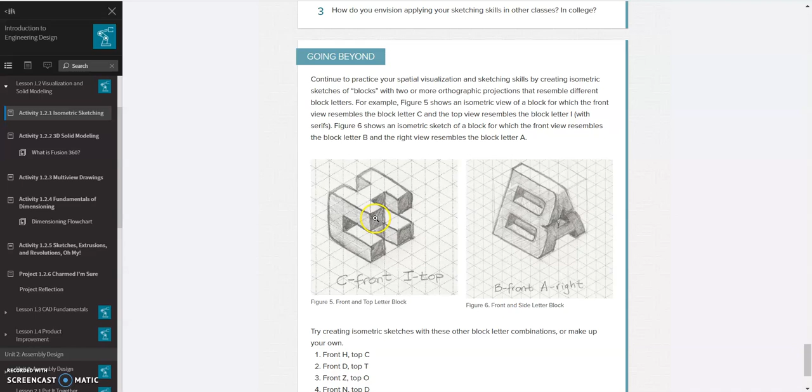In this video we're going to be using Onshape to create these initial cubes like we see here. In this case, we're going to be making a WC initial cube, so you can kind of see what it should look like. In Onshape, I already have a part started. We'll start by just making a cube, and then we'll do some subtractive methods to create our initial cube.

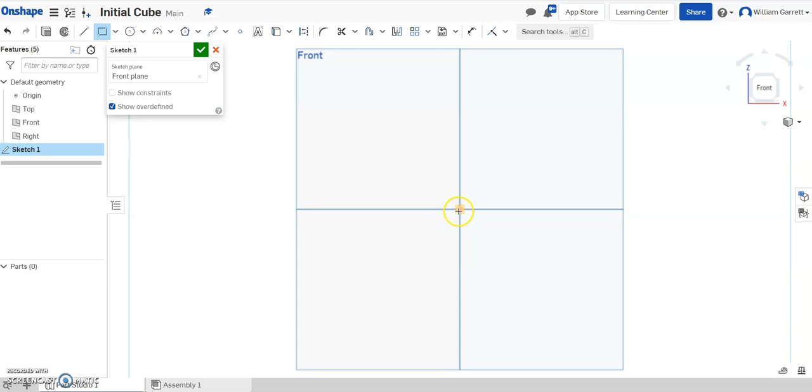So I'm just going to start a sketch. I'm going to put it on the front, and I'm just going to make a cube. So I'm just going to start with a square. I'm going to make this one 1.5 by 1.5 inches. And then to make it a cube, I'm just going to extrude that out. So I'll change my view, and you can watch where you extrude it out a distance of 1.5. These values may change depending on how our letters work out, but just to give a rough cube to start working with.

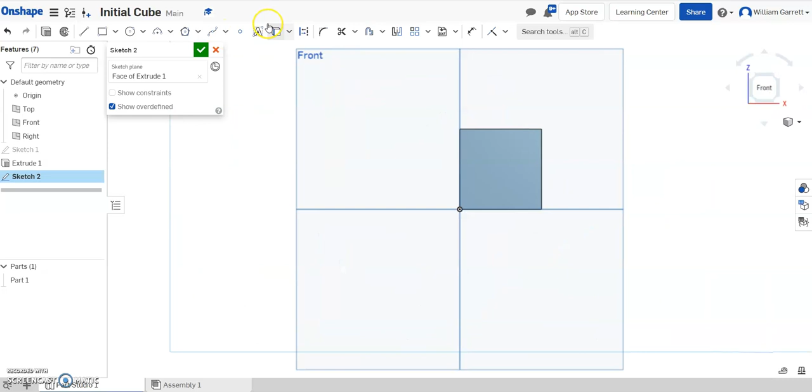So next I want to add my letters. I'm going to do that by starting a sketch. I'm going to click on the front face; that's where my W is going to go. So I'm going to turn to my front face. You can see the text up here. So I click text. I'm going to start in the top corner, go down to the bottom corner. I'm just going to type a capital W, and I'm going to make it bold so it shows up. And when I hit my green check, you see it's a little bigger than the cube I would need.

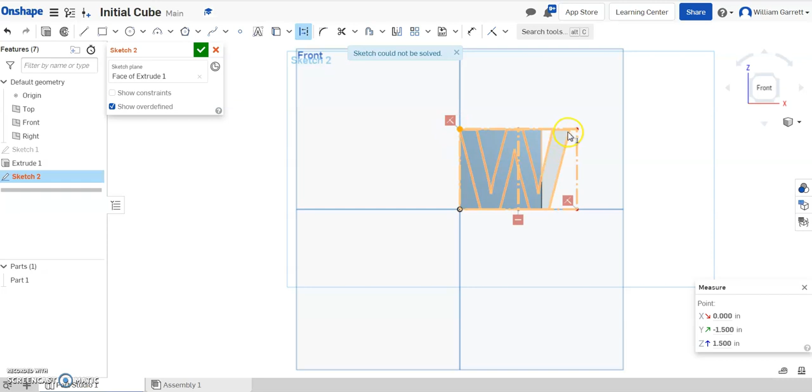So I'm going to measure how far it is from one point to the far point. It tells us we need 2.149, so 2.2 inches will be more than enough. So we're going to have to go back and edit what we've already made. I'll hit my green check now to accept, but we do have to go back and edit our first sketch. So I'm going to go back to sketch 1 and edit that sketch where it says 1.5 and make that 2.2 and hit enter. Hit the green check. And now you can see my W is fully within my cube. I have a little extra hanging over it, and I knew I would.

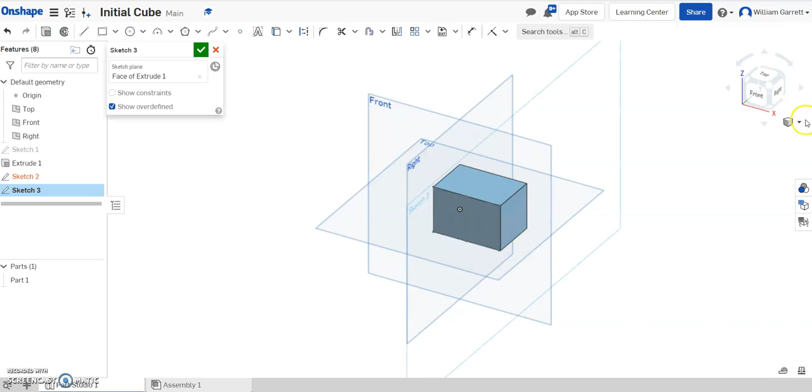That's perfectly fine. Then we'll come over on the side and do the same process, only with the letter C. So I'm going to start a sketch. I'm going to click on that side. I'm going to turn to the right side so I can see it. And then I'm going to hit my text. Start in the top corner, go down to the bottom corner, type a capital C. I'll make it bold just so it shows up better, and hit my green check. This time the C fits in there well. It stays in my box, so I'm good there. And I can hit my green check.

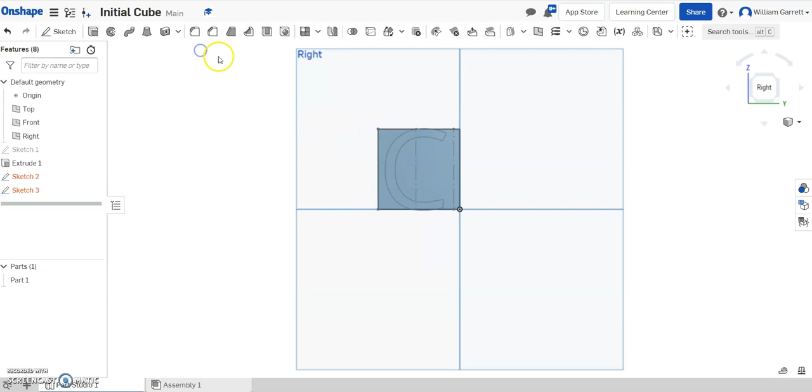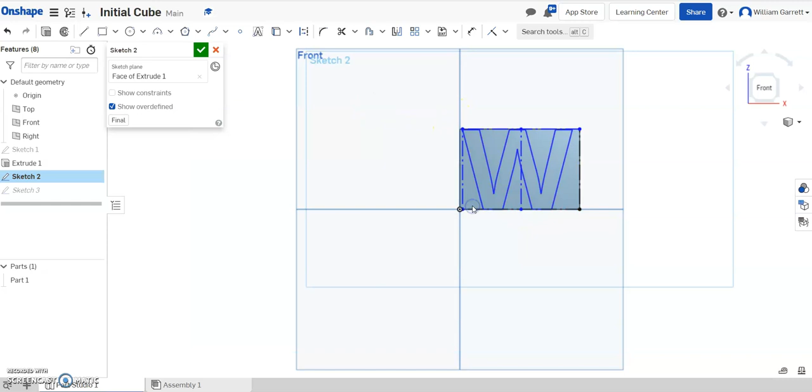Then it's showing some constraints it can't solve properly. We can edit that if you want to. All you have to do is delete those constraints. Once I'm in that view, I can delete those constraints. So I can right click and delete sketch entity, and that says my sketch is fine. I could constrain it and put it on the edge with some constraints. I don't need to though.

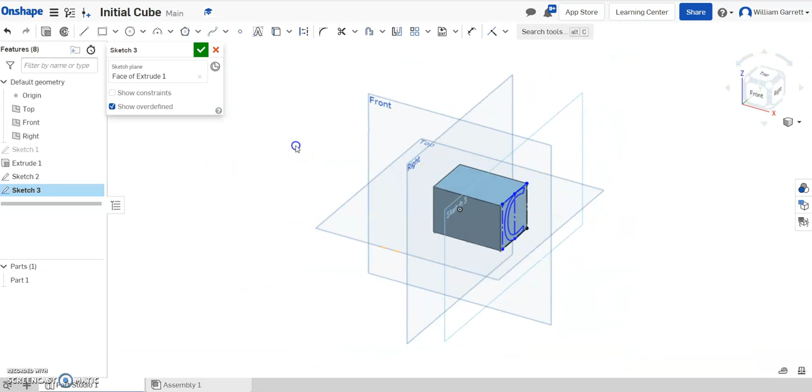I'll do the same thing with this sketch. I'm going to edit. I'm going to turn so I can see a little better. And I'm just going to right click and delete that constraint. Again, I'm not too worried about making it perfect here. I just want to get this initial cube created. So now we've got two good sketches. We could again constrain them, but we don't need to in this case.

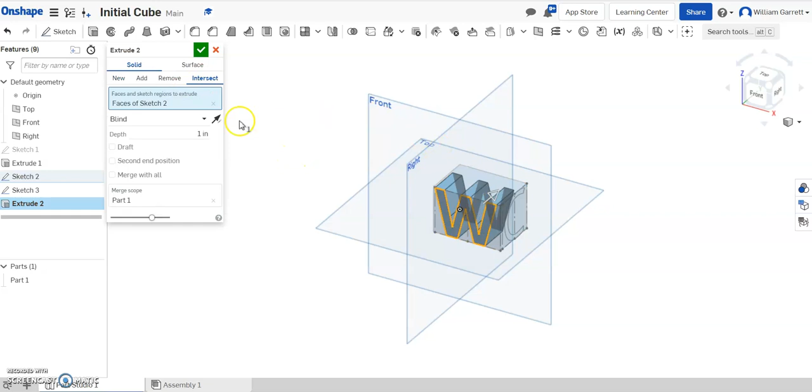Hit the extrude button to extrude out the W. This time it's going to be a little different. We're going to use this intersect button. I'm going to click inside my W so it's the W shape, and I'm going to change my blind to through all. This keeps our W and takes off the excess of our cube. So hit my green check, and that accepts that.

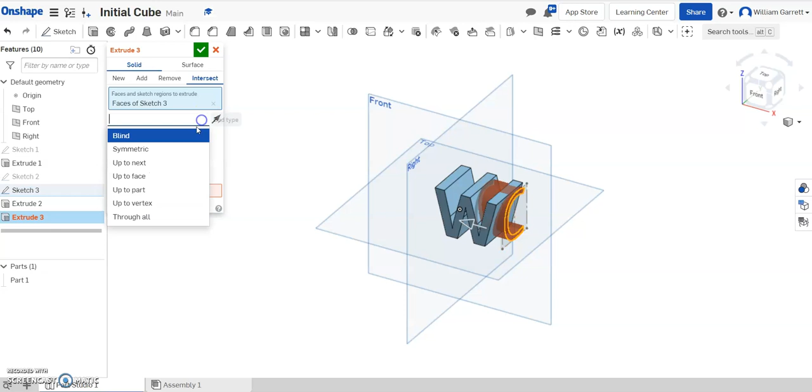Similar process with the C. I'm going to hit extrude. Again, I'm going to hit intersect. I'm going to click inside my C, and I'm going to change it to through all. This time I want to merge with all though. So I want to merge the scope, and that gives us that WC we're looking for. Hit my green check, and you can see on the front view, it's going to look like a W. If I go over to my right hand side, it looks like a C. So that's the initial cube I'm looking for.

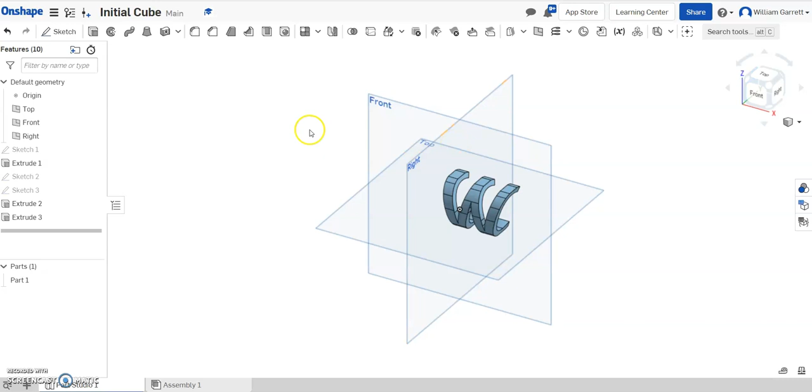Hopefully this helps you create your own initial cube using the first letter of your first name and the first letter of your last name.